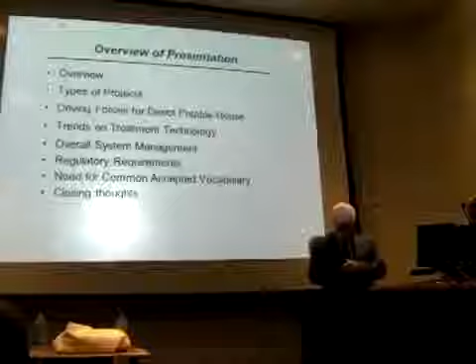That's not a good sign. Well, here's the overview of the presentation. How long was the bus ride? Three hours? Pretty close.

So what I'd like to do is give you an overview of direct and indirect potable reuse, and then really focus on the technology, because if we're going to do effective potable reuse, we're going to have to reinvent wastewater treatment. And it's a marvelous opportunity for you folks, because you're going to be the ones who, in fact, reinvent it. We'll talk about how it ought to be reinvented.

Now, I'm only going to ask one favor. On the overview, on the next slide, I'm going to ask you all to read it with me. I know, but just do me the favor.

Wastewater is a renewable recoverable source of potable water, energy, and nutrients. That's kind of the thrust of the presentation—I'll keep coming back to that theme as we go through. But it's really important to think about that. In the 20th century, wastewater was a waste. In the 21st century, we cannot think of it that way. It is a resource, and it is recoverable, and it is renewable.

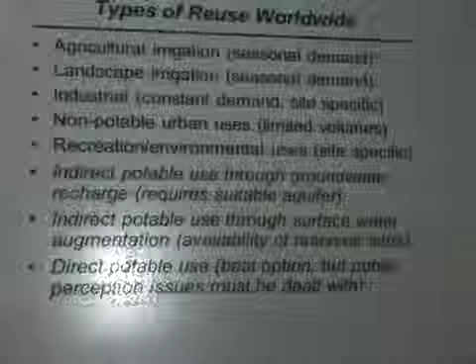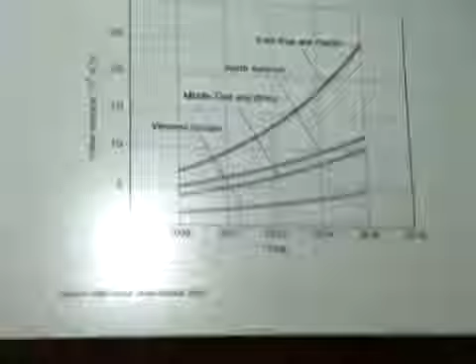If we look at the increase in reuse, without direct potable reuse, you can see that in various parts of the world a terrific amount of increase is anticipated by 2016, and it's hard to say even beyond that.

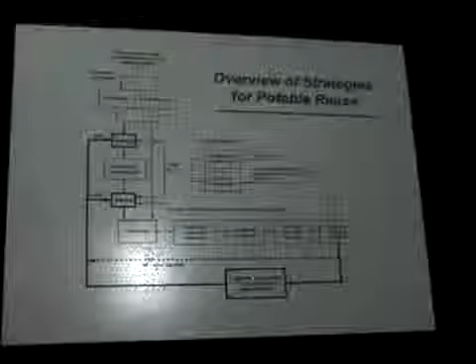In indirect potable reuse, the key thing is that there is an environmental intervention. If we look at the other alternative, we take the water from advanced treatment and put it into an engineered storage buffer. From here, we can either introduce it to the head end of a water treatment system or blend it directly into the community distribution system. So our two types are: indirect has an environmental buffer, direct has an engineered storage buffer. We'll talk about the differences between those two.

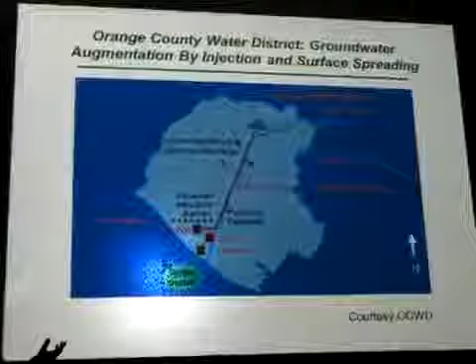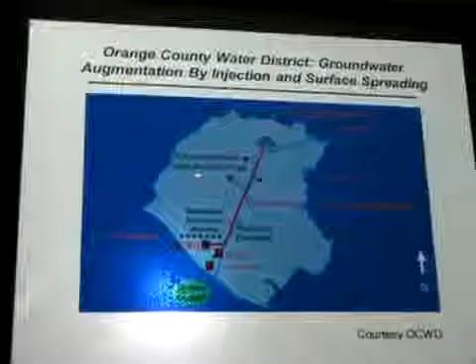If we look at types of projects first, this is the Orange County Water District, which is rather well known. There are two treatment plants here. The Orange County Water District processing facility is here. Advanced water is produced here and transported all the way up to spreading basins. They also use some of that for barrier injection wells, and they're now talking about mid-basin direct injection. This is kind of the gold standard right now in California.

But there's some things that are strange. Here is the reservoir they use to infiltrate the water, and they also use this one and this one. The thing that's a little strange is that we produce this advanced water, we've done everything to it but beat it with a stick, and then we take it up here and put it in this open reservoir, and we allow geese to defecate in it.

If you Google Earth Florida in the center part of it, you see all these things that look like hot dogs—they're all spreading basins. So there's a huge amount of indirect potable reuse going on here.

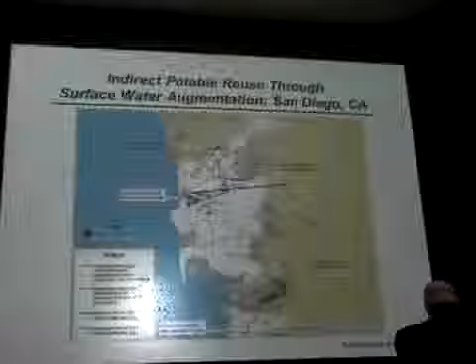Now, in San Diego, the thought is that we will take effluent from a treatment plant and pipe it directly to San Vicente Reservoir. We'll introduce it there, and from there it'll come down to the Alvarado Water Treatment Facility and then be distributed. The concept is we're going to take wastewater, treat it, and inject it into the surface water reservoir.

Here's the surface water reservoir. This is San Vicente. Rather a lovely place.

Now let's take a look at this. If we picture this, Orange County Water District, shown up above, takes water from a wastewater treatment plant, treats it in a reclamation plant, and injects it, whether by surface spreading or wells. In San Diego, Singapore, and Australia, they take the water and introduce it into a storage reservoir. In Windhoek, Namibia, they have the wastewater treatment plant and water treatment plant, and 30% is injected directly in front of their water treatment plant.

There's something really interesting that happened in Namibia. They told the public that this thing was going to turn on Monday, and they got phone calls you cannot imagine. Everyone called up saying, I drank the water and my eye turned purple, or I drank the water and my pants fell off—just incredible things. In point of fact, they had never turned the water on. They didn't turn it on until three months later. So it's been very, very successful.

But it's just an interesting story in why we have to do a lot more with public perception, and why that becomes so important in what we're thinking about doing here.

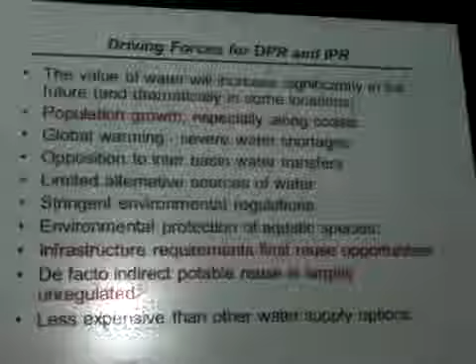Now, the driving forces—there are any number of them, but I'd like to comment on three: population growth, especially along coasts, infrastructure requirements, and de facto unregulated indirect potable reuse.

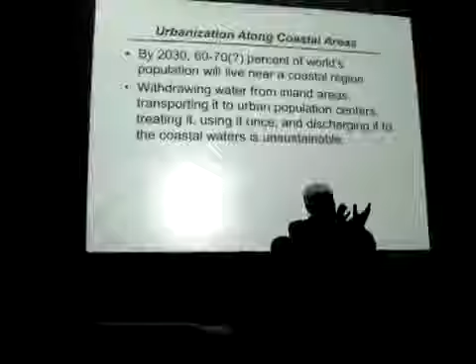To me, this is the most significant factor. It's projected that up to 70%, maybe even 80% by some projections, of the world's population is going to live within about 120 kilometers of a coastal region. Now think about it—you're going to take water from the interior of the country, bring it to the coast, use it once, and dump it. It is unsustainable.

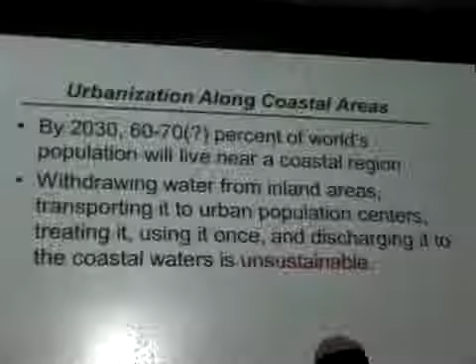I'm not going to go through all the rationale, but if you sit down with pencil and paper, you'll find that it's unsustainable. And as you move more of the population toward the coast and take more water from the upland, you change the upland hydrology, and that becomes very significant. We want to avoid, if we can, unintended consequences. So anyway, first of all, it's going to be unsustainable.

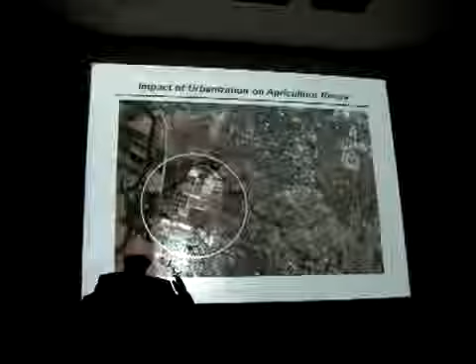Let's look at Sacramento. When I first started at UC Davis, the Sacramento wastewater treatment plant is circled here, and there wasn't a single house here—not a single house. What's happened is that urbanization has now complicated our lives with respect to reuse. People would say, well, why don't you reuse this water for agriculture? Well, now you've got to pump it somewhere, and I'll talk about pumping costs in a moment. But urbanization all over the world has affected us dramatically.

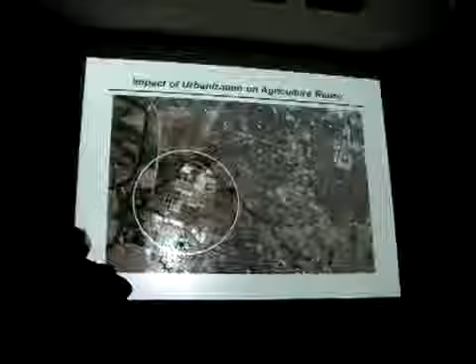You'll recall the way we located treatment plants historically—we found locations that would drain by gravity, because we used steam pumps in the early 1900s that were not reliable. So gravity was thought of as the solution to get this water out from the city. But what's happened now is that all through the country, treatment plants are surrounded by urbanization.

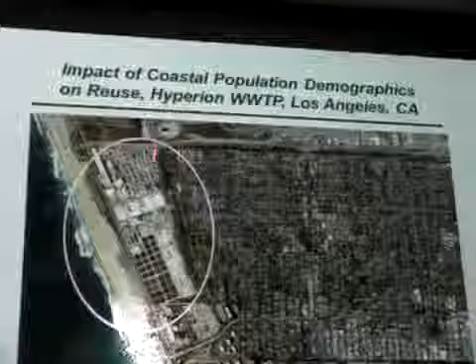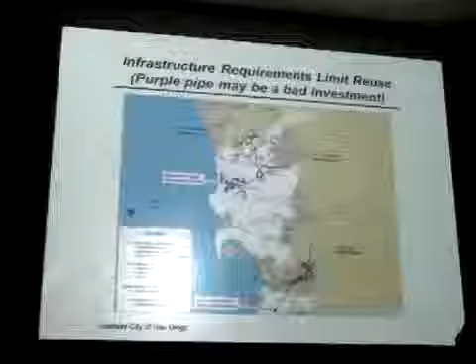Now, another thing we talked about in the past is that we've put in a lot of purple pipe. The interesting thing is, in San Diego there's an enormous amount of purple pipe, but at the end of the day, how much water has actually been recycled? A very small amount—2 mgd or something like that. Golf courses take some of the water, and then they say, oh, by the way, store it for us over the winter. Really a non-starter.

Going forward, it's my belief that purple pipe is a terrible investment, for the following reason: what it tells the public is that we don't believe the water we put in the purple pipe is as good as the drinking water. And we're to the point now where our wastewater treatment facilities essentially produce drinking water with very little additional infrastructure. So I think that when we start thinking about putting in additional purple pipe, where we are today, it's not a good investment.

If we look at agricultural irrigation, we have long distances, energy and pumping, storage. Landscape irrigation has dispersed nature and cost of parallel distribution. For indirect potable reuse, most communities lack suitable hydrology for either groundwater or surface water storage.

Now, unregulated de facto indirect potable reuse. What do we mean by this? Let's take the Colorado River. There are 456 discharge permits on the Colorado River.

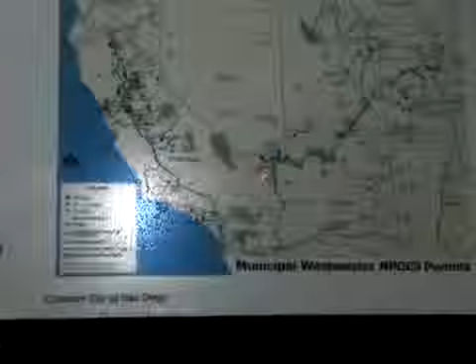256 are active. So what's important here is you go skiing in Utah, and two weeks later you go down to San Diego to go boating with your friend. You drink the water, and you've bonded with yourself. It's like going to New Orleans - you drink the water there, and you always get a warm feeling. You've made five other friends, some in St. Louis and other locations.

Incidentally, the other thing that's really curious here in San Diego is whenever they clean out this canal, they always find five or six car bodies, and all these things are leaking everything into the water. So when you're in San Diego, you're not drinking pure mountain water - you're drinking really terrible stuff.

This indirect potable reuse, for example, another case is Dallas and Houston. During certain times of the year, 75% of the river water between Dallas and near Houston is wastewater. It's pumped out, treated marginally, and that's the water supply for the city of Houston. So this is going on all the time. The indirect potable reuse generally is uncontrolled, and that's the key point we want to stress.

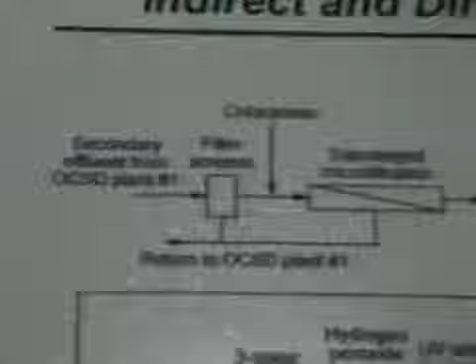If we look at the Orange County treatment system, we have microfiltration, cartridge filters, reverse osmosis, advanced oxidation, carbon stripping, lime saturation, and so forth - this is the flow diagram. Now, one might question why you have cartridge filters here. Well, the reason is that the chemicals used for scale control in reverse osmosis aren't pure enough, so you use cartridge filters to remove the residual impurities present in those chemicals.

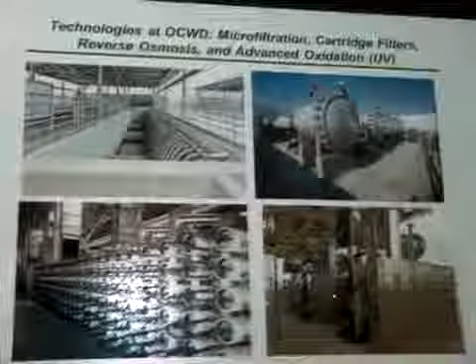Here's what it looks like physically. Here are submerged filters, cartridge filters, reverse osmosis. This one bank is 5 million gallons per day, and here's the advanced oxidation. Each of these reactors is in series, with 72 UV lamps in each.

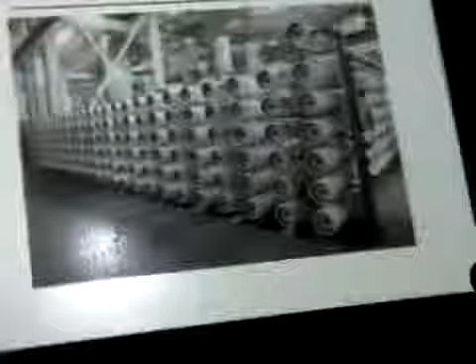Now, what's interesting, and as we move ahead, is one of the things we're going to continue to do at treatment plants is run pilot plants simultaneously. In this case, we have a module up here, and every manufacturer of membranes can put one of their modules in here so we can compare the performance of that module versus the online modules. This is an ongoing process at Orange County Water District, and it really gives you an opportunity to test full scale. I think as we move ahead, we're going to be doing more of that kind of thing.

Here is the carbon CO2 stripper and the lime saturator.

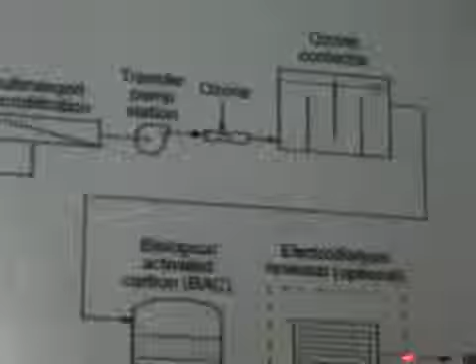Now, people that are inland say, wait a minute, if you have reverse osmosis, it's okay if you're near the coast because you can dispose of the brine in the ocean. There are a variety of other technologies being put forth: microfiltration, ozone with an ozone contactor, biological activated carbon, and electrodialysis as one option. It's for sure, in your career, you'll come up with other options for doing this. This one has proven to be very effective, but again, because it hasn't been tested, the state of California is somewhat reluctant. That's going to change in time.

Now, what's important about these two systems? If we look at the energy use, the MF ozone BAC process is 0.03 to 1 kilowatt hour per meter cubed. If you look at MF RO UV peroxide, it's 8 to 10. So there is a significant energy difference in these two processes.

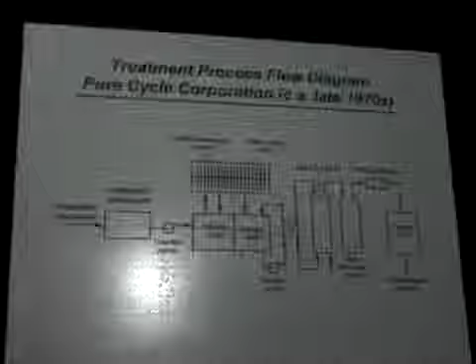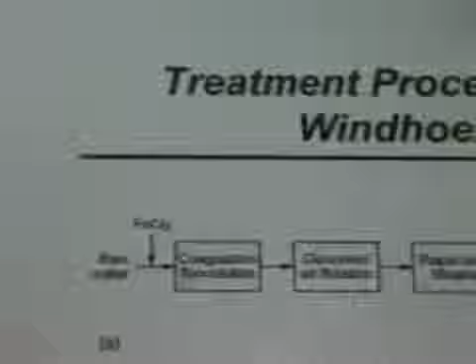If we look at Namibia, here's the original flow diagram, and then it became more sophisticated—this is the flow diagram currently in operation. Again, you can see they do not do it with reverse osmosis.

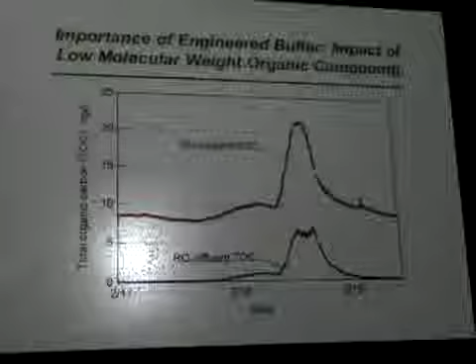Here's the typical actual flow diagram of a low molecular weight organic compound. You can see it typically goes in at about 8, and the effluent from the RO is about 0.35 on a consistent basis. Then we get this blip. So the idea is that if we get some of these blips, we're able to trap them. The question becomes: how long does it take to analyze for a specific compound? And we have to determine what specific compounds we need to analyze for—that's an ongoing question and research topic.

With respect to engineered buffers, they can be anything—above ground storage, subsurface, aquifers. There's no limit to the configuration they can take.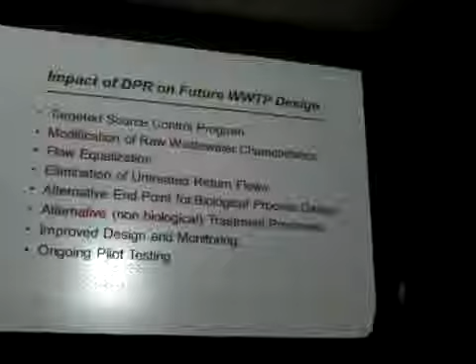Now let's talk a little about the impact of direct potable reuse on the future of wastewater treatment plant designs. I've talked a bit about source control. I'd like to highlight these ideas because I think they're so important. The first one is: why do we accept wastewater the way it comes down the sewer?

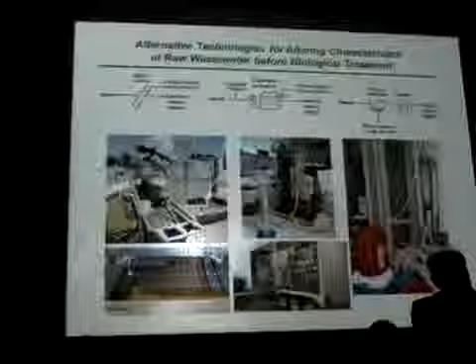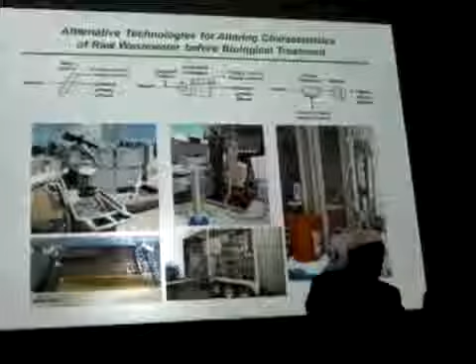What do we do? Well, we remove solids, we remove grit, we settle it, and then we say no matter what it is, we'll treat it biologically. Now why should we do that? Why shouldn't we alternatively ask how we can modify the characteristics of this wastewater to optimize biological treatment or subsequent treatment? I'd like to give you three examples that we're looking at—there are many more out there, but let me give you three.

The first one is the so-called cloth filter. This is a replacement for a primary clarifier. You screen out all the bits of plastic, and these things work well.

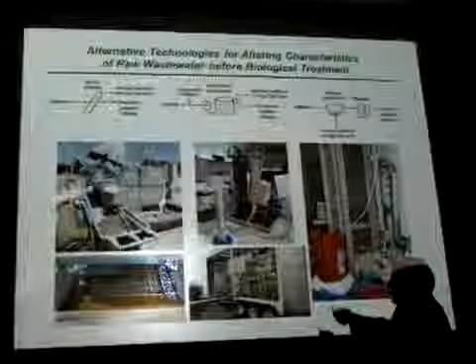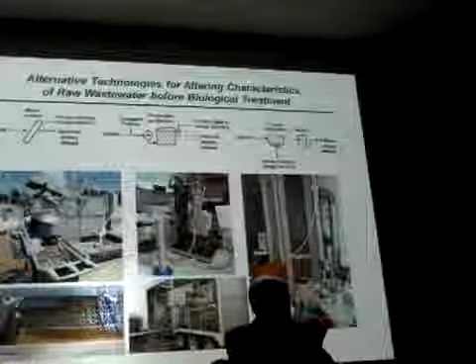This next one is an interesting process called charged bubble flotation. It's not dissolved air flotation, which you're familiar with—that's where you pressurize and dissolve air in the column. Here you produce a froth, then coat the froth particles with a polymer, and to the polymer you attach nanoparticles for the removal of specific compounds. So now you can tailor the characteristics of wastewater before it ever gets to biological treatment.

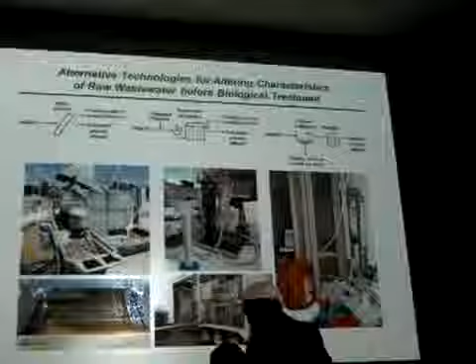Now the last one is filtration. We can take primary effluent and filter it with what's known as the fuzzy filter—this is just one example. Fuzzy filters are round plastic balls like this; they're porous and compressible. So now we can filter it and produce a very high quality effluent at this point.

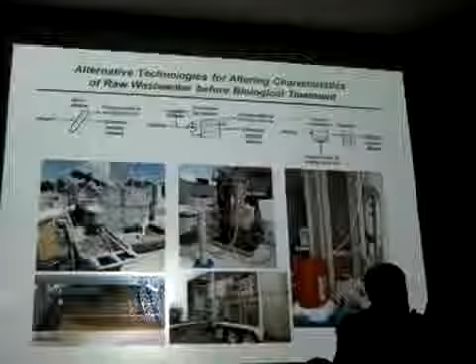Now you look at these things, and they do one additional thing that is really dramatic. If you filter primary effluent, you alter the particle size distribution. And when you alter the particle size distribution, you change treatment kinetics.

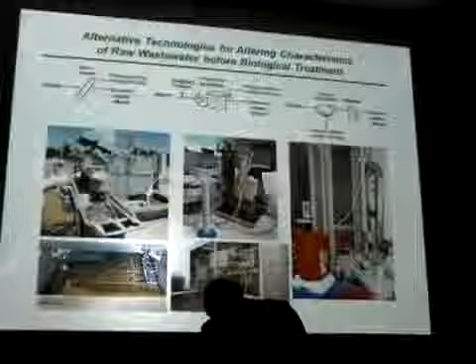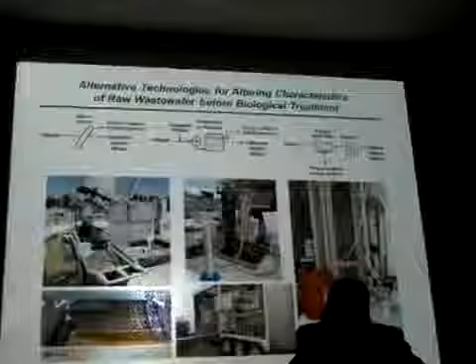For example, if you had a large particle coming over a primary clarifier, it might be the size of this table, and this is the size of the bacteria. So the bacteria has to excrete extracellular polymers to solubilize this for metabolism. On the other hand, if the particle is twice the size of my fist, it's just going to take less time. In a study done in 1957 by Balmat at Rutgers, he found that the increase in the kinetic rate is up to a factor of 4. So by altering the characteristics, we can change that.

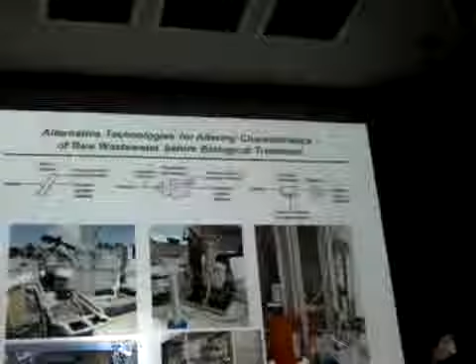Now, we can also do other things. For example, we can take this effluent and run it directly through a microfilter. There are no ends here to the possibilities. But here's the thing that's important.

What are we saying? Instead of incrementalism, where we change something on the primary clarifier, or change the arm, what we can actually do is leap over that. We can leap over that with new technology. And that's where the future lies.

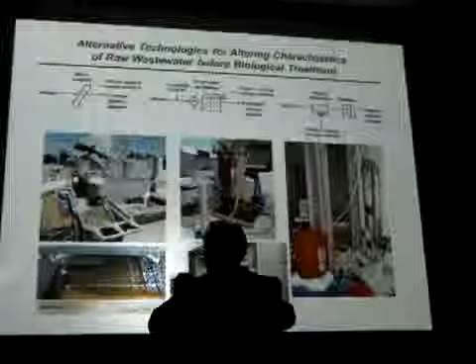Not incrementalism. Because if you think about the way we've done wastewater treatment, we said, let's remove floatables and settleables. Then we said, let's remove biodegradable organic matter, so we added another process. Then we said, well, we ought to remove nitrogen and phosphorus, so we added two more reactors. And then there were still some residual solids, so we added filtration. That's what I call incrementalism.

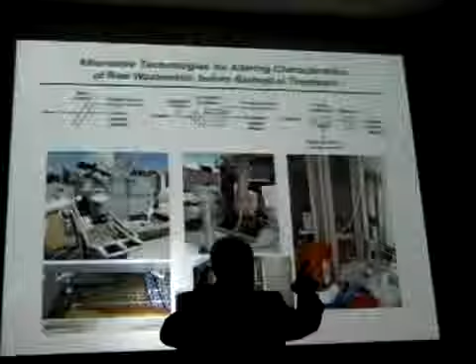And that's not going to bring about change in the future. What's going to bring about change in the future is when you leap over those. For example, the cloth filter is a leap over that. It's not a sedimentation tank, it doesn't look like a sedimentation tank, and it performs differently. Charged bubble flotation is one-fifth the size of a sedimentation tank. These are just but a few examples of what's going on out there in the field in terms of people thinking about how to make the big jump.

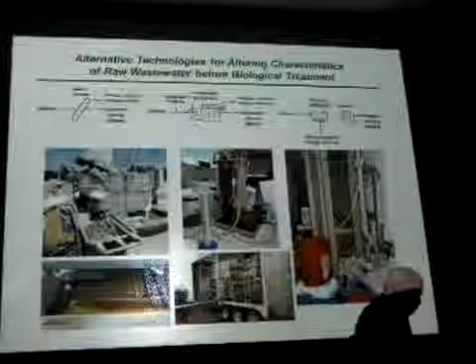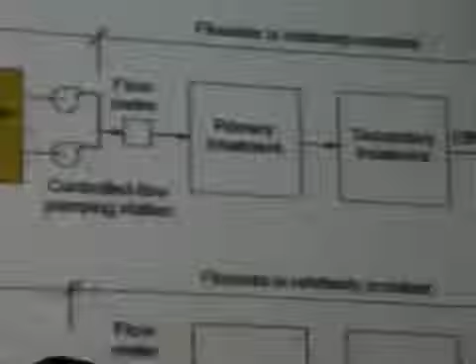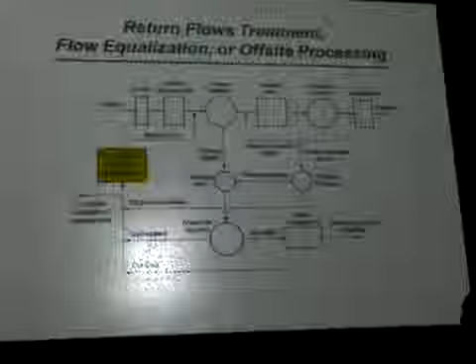On return flows, typically we return thickener overflow supernatant concentrate back to the head end of the headworks, or sometimes in front of the aeration tank. Now the problem with that is we tend to return these flows during daytime hours when operators are present. That complicates the treatment, because instead of introducing it in off hours when you have excess treatment capacity, you're now introducing it when your system is stressed. And then you bring in organic carbon that's non-biodegradable, and then you're saying, well, why can't we meet our nitrogen limits?

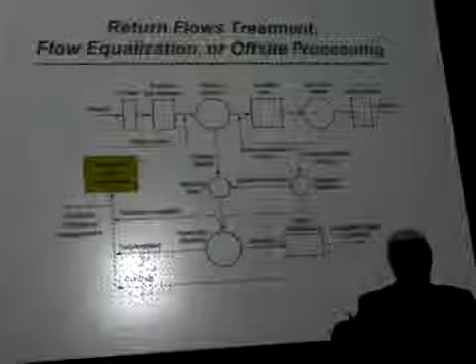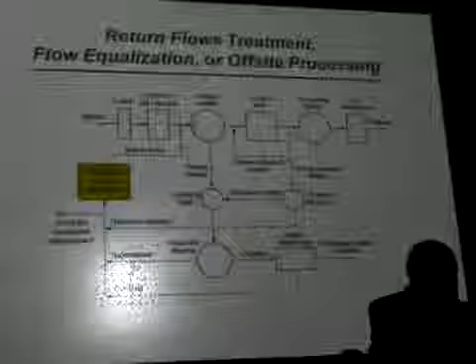So on this, I'd like to stress why this is so important. In San Diego, the city said, we're going to pilot the treatment system that Orange County Water District has used. We asked them, why don't you pilot other things? And they said, that's really not our interest, our interest is in getting this approved. So they piloted the same thing, and they started monitoring everything, thinking they would find exactly the same stuff. Turns out they found nothing.

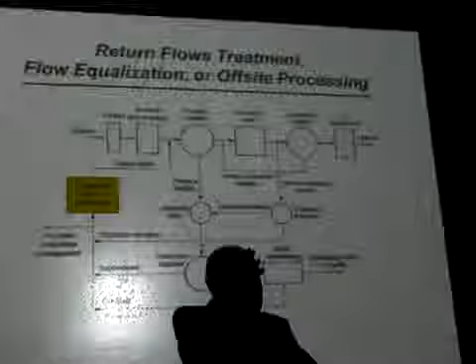The reason was that it's a scalping plant. It operates at constant flow, and all the return flows are directed to Point Loma. They never enter the treatment plant. You cannot imagine the improvement in performance when you do that. For example, Tillman, the treatment plant in Los Angeles, operates at constant flow, and their turbidity coming off the clarifiers is less than 2 without any intervention.

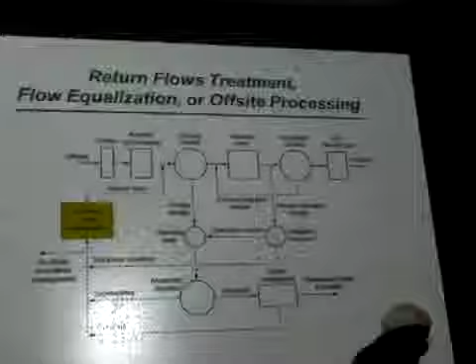So what I'm saying to you is that if we start thinking about direct potable reuse, we're going to have to think a little bit differently about how we design our systems. Now, suppose I asked you, as students on an exam question, what's the end point of activated sludge? What would you say?

Okay, 18%. How many would say discharge to the environment? Well, wait a minute, if it's not discharge to the environment, where the hell is it going?

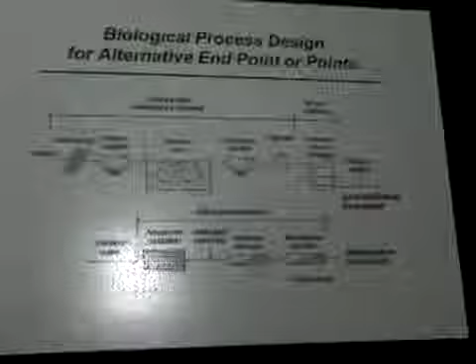The point I'm making here is this. If your endpoint is discharge to the environment, what are you concerned about? You're concerned about nitrogen, phosphorus, all these elements. But what if I told you the endpoint of activated sludge treatment should not be discharge to the environment, but should be influent feed to a membrane system? It works out, you would design your process differently. You would not design it the same way. And we know how to do that.

You would design it, for example, perhaps to remove trace organics or other kinds of compounds. But the thing you really would ask for is you would ask the membrane people to tell you what kind of quality do I need to optimize the performance of my membranes? And then you would work backwards and say, how do I design the activated sludge process to give me that kind of quality?

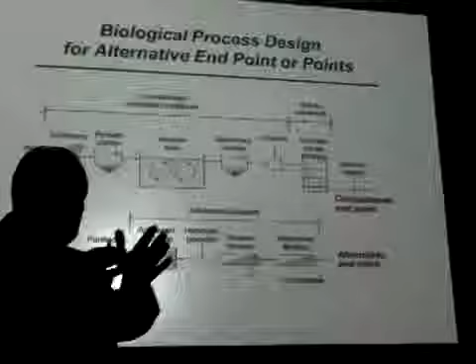The key point here is, in the future, think about different endpoints. You don't have to always think about discharge to the environment. It could be discharge to a membrane, it could be discharge to reverse osmosis, and who knows what other processes will come along. So the key point is that we need to now start thinking differently about the processes. We tend to teach activated sludge as an end-all, like it's the end of the world. It's only the beginning as we move ahead.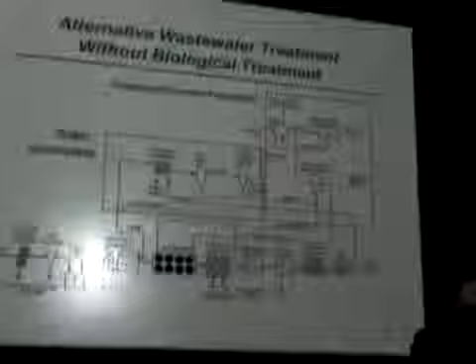Now, I hesitate to put this up, but here is a complete treatment process without activated sludge. So we're going to adsorption, zeolite ion exchange, ultrafiltration, reverse osmosis, advanced oxidation, purified water. And then we process the solids here with a pyrolyzer.

It was really fun being here, and I was talking to Dr. Cooper, and this matched up with some work that he's doing directly. We go over here, we produce power, but we also produce biochar, and we bring back that biochar, and that becomes our adsorptive medium here.

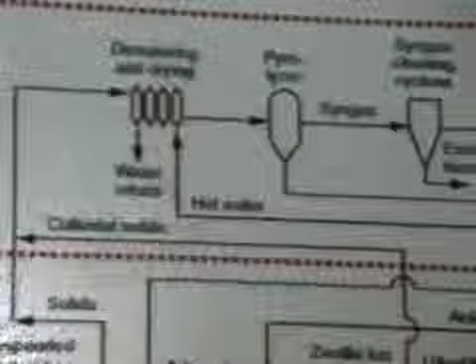Again, what's the purpose of this diagram? The purpose of this diagram is to let you know that you're not locked into activated sludge. Now, you might say, well, I don't think it'll work. That's okay, I don't mind that. But it's certainly a concept that we ought to test. It's a testable concept, and the pieces work. So it's a question of how we want to think about it.

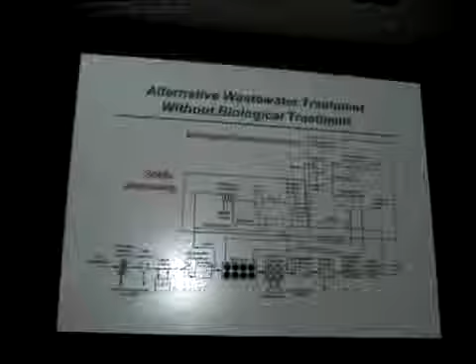Look what we've done with activated sludge. We've tinkered with it. We started, and then we had filamentous issues, and we figured out how to do surface skimming, and we did all these things. But that's incrementalism. So how do we leap over activated sludge? I'm not suggesting that we should, but if you think about it, how should we leap over activated sludge?

Again, this is just a thought piece. I wanted to talk, before I do this case study, a little about the effluent here.

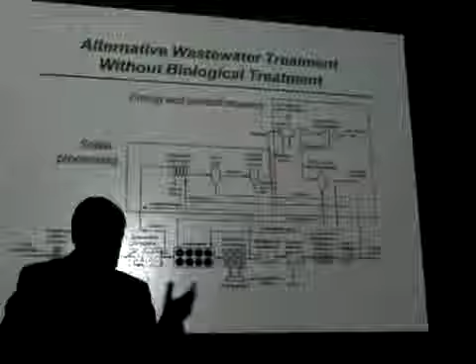What's interesting is that people are concerned about endocrine disruptors. Typically, you might have 20 parts per trillion of an endocrine disruptor. The interesting thing is 20 parts per trillion of an endocrine disruptor will cause sex reversal in fish. On the other hand, and you folks can do this computation, you would have to drink 496,000 8-ounce glasses of water to get what a woman gets in a single birth control pill.

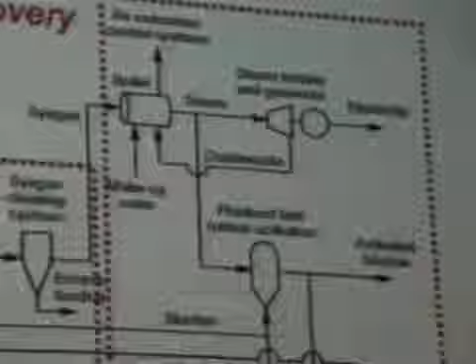So, if you're really interested in saving the environment, what's the answer? You should drink it. I don't see much enthusiasm for these ideas.

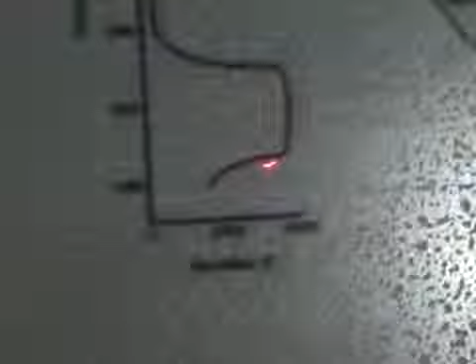All right, so let me give you a DPR case example, Southern California. Here's a picture of Southern California, and on the left-hand side, we have the pumping. Here's the elevation difference that we have to go over. There is energy recovery, but we have to pump this water over the Tehachapi. If you're going to reuse it, you can't imagine pumping it back, because this already takes 20% of all the energy in California.

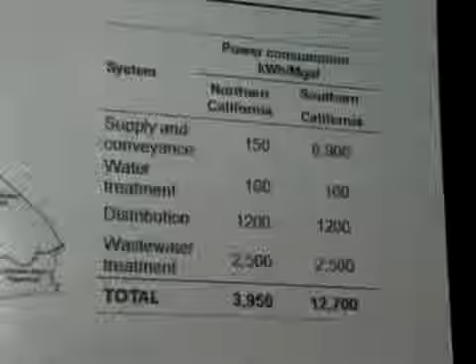So let's take a look at supply and conveyance. In Northern California, it's about 150 kilowatt hours per million gallons. Southern California, it's 8,900. And that's why, really, this becomes significant as you think about it over the long haul. Now, look what happened, look what's happening in California. Our governor wants a monument.

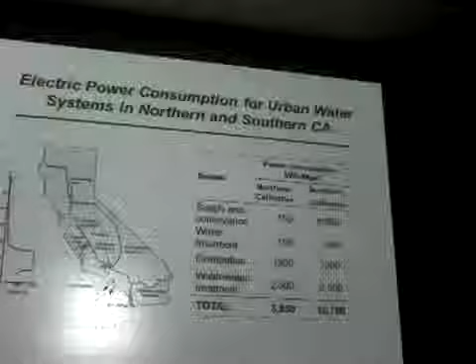Your governor wants to tinker with education, but ours wants a monument. What does he want? He wants to build two twin tunnels around the periphery of the delta. These tunnels are projected to cost $30 billion. Now, if this is like the Boston dig, recall that was going to be $3 billion—it's now $16 billion and counting. Keep that in mind.

So what's the proposal here? The proposal is this: instead of discharging here, we'll treat all this water locally and provide purified water.

Now, how many of you drink bottled water? Come on, fess up. Here's the interesting thing: you pick up this bottle and it says purified water. Did you ask if it was wastewater yesterday? It probably was—could be. But you're good to go, right? It says purified. So public perception is an issue.

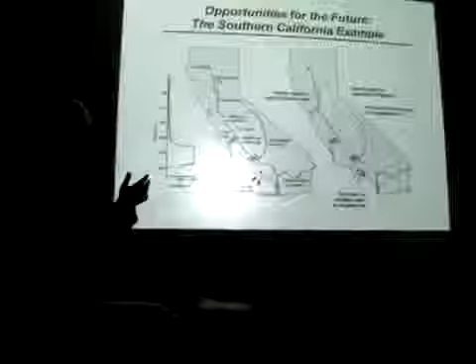And while we're talking about public perception, before I get to the answer—public perception about water reuse depends on how you ask the question. If I came up to you and said, are you willing to drink wastewater, you'd say, oh, I might have to think about that. Oh God, I don't know. On the other hand, if I show you a picture of the Colorado River and the fact that you're already drinking really terrible stuff, attitudes change.

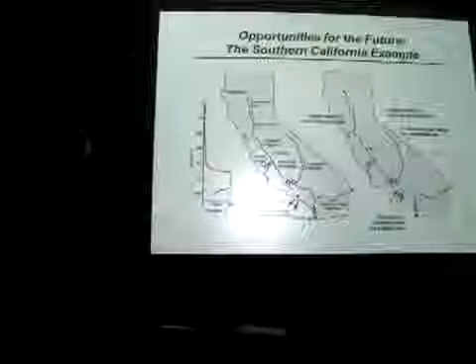In San Diego right now, 67 to 73% favor direct and indirect potable reuse. The City of Los Angeles has an enormous groundwater basin contaminated with TCE, PCE, Chrome 6, Chrome 3, and other things. So they surveyed the public: which would you favor, treating groundwater and drinking it, or treating wastewater and drinking it? Eight-to-one favored treating wastewater. Why? Because they don't trust the city to treat that water. And yet they've seen the Orange County Water District system and are perfectly comfortable with it.

All right, so now, if we do this, how can we do this? It works out that Los Angeles is decentralized. That's a really interesting phenomenon, because there's a lot of talk of decentralization in small systems, but here we have a very large system. This is the Tillman plant in Glendale, and this is the Hyperion plant we looked at, which discharges to the ocean. This is the Los Angeles County Sanitation District—these are the upstream plants, and this is the joint plant, which also discharges to the ocean.

We could locate a water treatment facility at each of these locations—I just put it there for purposes of comparison. It works out that I can treat one billion gallons of water a day, the same amount that would be transported with the system before treatment, for $5 billion. So my point here is that at least we need to think about these alternatives.

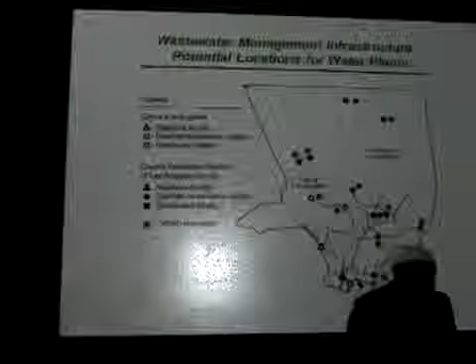There's a huge difference, and I can give you two stages of reverse osmosis if you're not comfortable with one. So we now have to start thinking differently about the way we do things. The benefits: a reliable source, low cost. Let me give you an example—Orange County Water District now treats their water at a cost of $785 an acre-foot, and an acre-foot is about 323,000 gallons roughly. Raw water now is selling in Los Angeles for $1,000 an acre-foot. In your lifetime, water's going to go up by a factor of ten. It's highly subsidized now, but we're moving into an era where it's really going to go up.

So I'd like to say something about regulatory requirements. Pre-1880s, we had physical observations. You know what they did? They took a sample of water and put it on a windowsill, and if it developed growths, it was probably not safe. But they were already dead, so it didn't matter much.

So we had to have better methods, so we developed empirical methods. The period of enlightenment, 1880 to 1980s: science develops, and observational and semi-empirical regulations evolve. For example, in California for reuse, we have an effluent turbidity standard of 2. How did that come about—through science? No, it came about because it was achievable. That standard has no bearing in science, no bearing in anything. It was achievable.

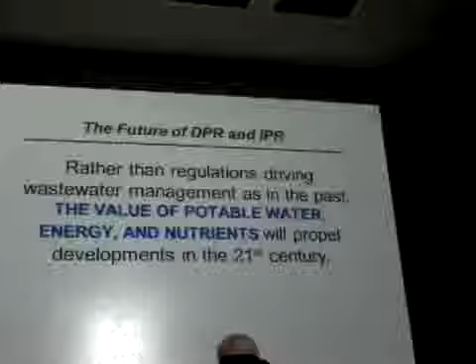Finally, what I'd like to leave you with is that we've talked about regulations, but in the 20th century, regulations were what drove innovation, or drove treatment. In other words, as we got more rigid standards, we had to add one more process—incrementalism. In the 21st century, I am convinced, not only here in the United States but worldwide, the value of water will drive development, because it's a truly valuable resource. And because it drives development, we will lead the health departments, not be subject to it.

I'm absolutely convinced. And that means that we really need to accept the value of water, and that water is so valuable that treating it—let's say with double reverse osmosis—is inexpensive compared to its value. Now, Tom Friedman wrote an article in the New York Times a couple of Sundays ago.

There are potentially 42 million people in Iran that might have to be moved because of the lack of water. Can you imagine what a migration like that will do to the Middle East? It's just amazing to contemplate. There, the value of water will drive what happens in most of the world, and certainly in our drier southwest regions and elsewhere, that will be a major focus. And with that, I'd like to thank you for listening.